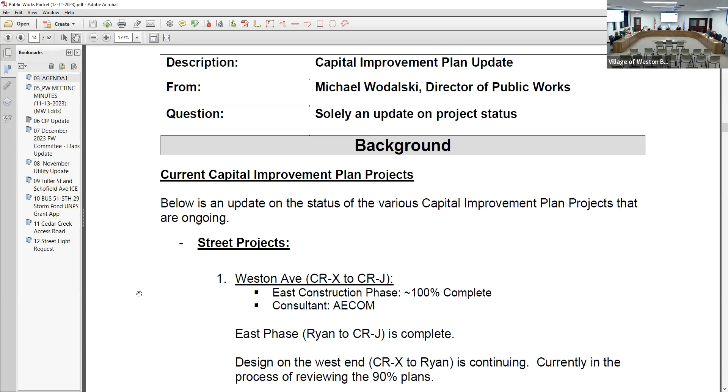Thank you. The staff report, item 6, CIP update, Michael? So Weston Avenue on the east side of Ryan is done. Driven on it. Kind of reminds me of the scene from Cars when Lightning McQueen paves the new road.

If the seeding is done, everything is done? Yeah, there'll be some restoration likely in spring where the grass isn't fully grown back through, but for the most part they were seeding as they went. How much are you holding back?

I don't know off the top of my head, but it's at least 5% of total construction. I would say 10 maybe? We can't, read the spec, see what it said. Yeah, the contract, let's see what it said. We used to be 10%. State law changed a few years ago, so now it's 5% of the contract.

So we're working on design still on the west end and right-of-way work. Currently going over the 90% plans and trying to get a meeting scheduled with AECOM. Oh, here comes someone.

Jasper, is that you? Yes, sir, it's me. All right.

Who's gonna put all the iron back in the ground? The property irons? Yeah, so that'd be the contractor, their surveyor responsible for that. Okay, as long as it's done.

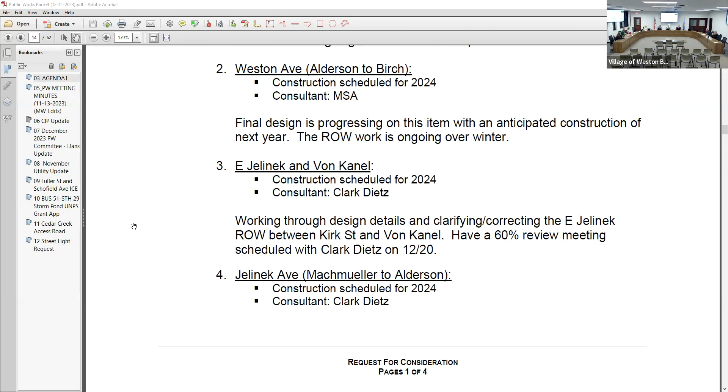Let's see, other fun items of note, we have a few meetings scheduled with Clark Dietz over the next 2 weeks to go over the 2 Jelinek projects. Looking at getting the repaving between the junior high and senior high bid out probably in early January.

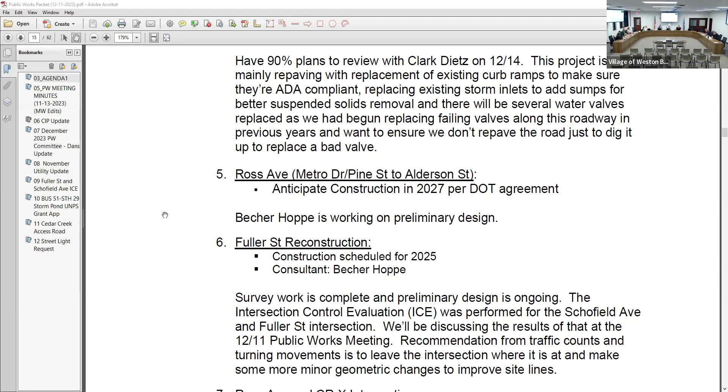And then the other East Jelinek Von Kanel bid out later, probably late February, early March. Let's see, Becher Hoppe is looking at getting a meeting with the DOT together for the Ross Ave joint project with Schofield, so we can start making sure we're following the DOT design timeline appropriately and getting that project ready for the 2027 construction.

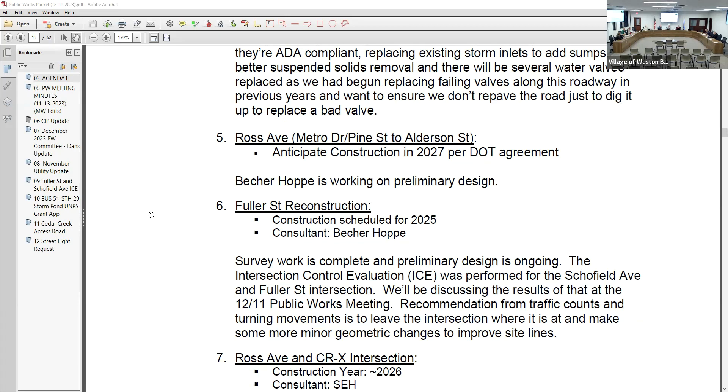For Fuller Street, got item 9 in the packet. Becher Hoppe and their consultant TADI finished the intersection evaluation for Schofield Avenue and Fuller and Old Costa, so just kind of looking at giving them direction moving forward on what alignment they should be pursuing.

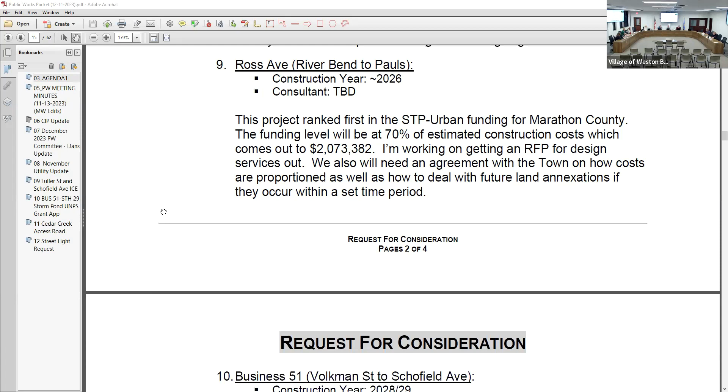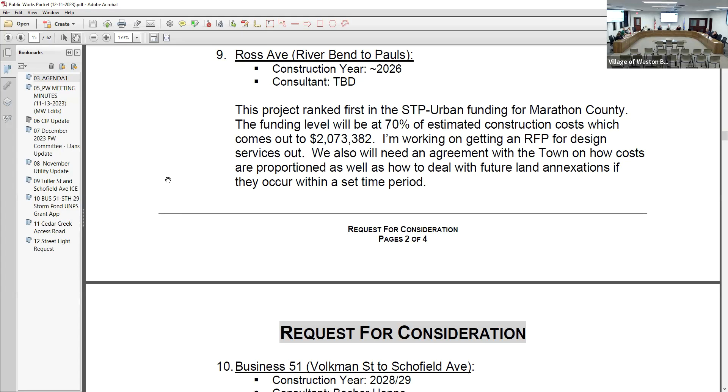And I guess the other big thing street-wise is working with the town of Weston on getting an agreement in place for the Ross Ave project, as well as getting the design RFP out for that, for construction in 2026. So we'll need to get a design going here quickly in 2024 to meet those DOT deadlines as well.

And then as we talked with AECOM on the water side earlier today, we'll be looking at getting the well 4 and treatment plant updates for the PFAS removal bid out just after the first of the year here as well. So we'll get started on that then.

Does that include the iron and manganese? It does not. The iron manganese will be after. That's part of where the DNR had us break out well 3 from well 4. So we'll be working on getting the iron manganese pilot testing done probably in January, so that we can use that data to submit well 3 for PFAS treatment and iron manganese removal in next year's Safe Drinking Water Loan Program. So it'll lag well 4 by a year.

But all the work at the treatment plant will be done and sized for PFAS for both wells, not just well 4.

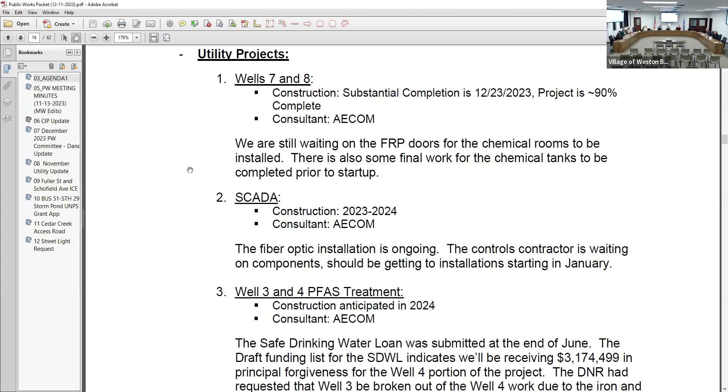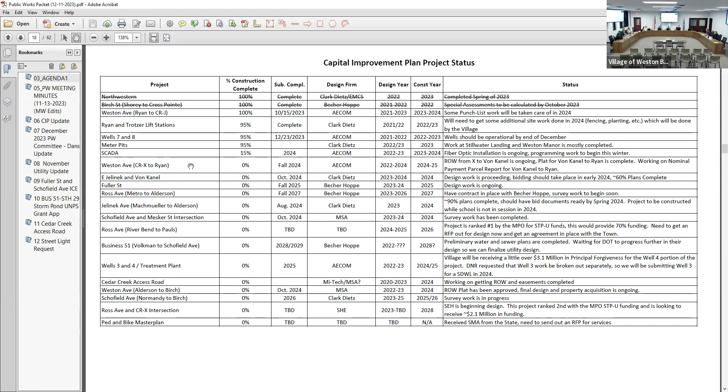Yes, I have the spreadsheet of kind of where we're at construction schedule-wise, who's doing what, and then I should start throwing a map in. At one point Luis said maps were good, he's a visual person, so red is what we're looking at getting done next year, and then orange would be 2025, green 26. So all colors of the rainbow.

And Mesker and Schofield, that'd be next year. So how's the design coming?

I met with MSA two weeks ago. We have a few utility conflicts we need to work with WPS on, with power poles and where those could get relocated so they're not in conflict with the traffic signals. Once we know what options we have with WPS, that should be able to be finalized.

I think we'd like to see the preliminary design here first. Sure, I can do that next month. Also, I think they should design the lighting so the red light comes on when the fire department takes off from their shop. Everything should be red for them before they get to the intersection. They can do that.

Is that like a special setup? Yep, they put a switch or do something in there so the fire department can turn the light red before they get to the intersection. Is it mounted on their vehicles? It's an Opticom, yeah, it could be.

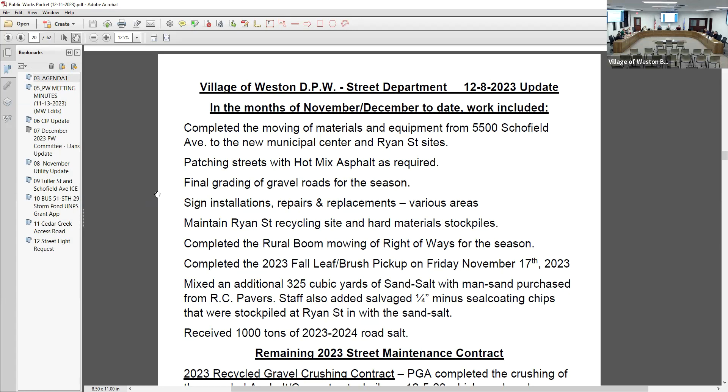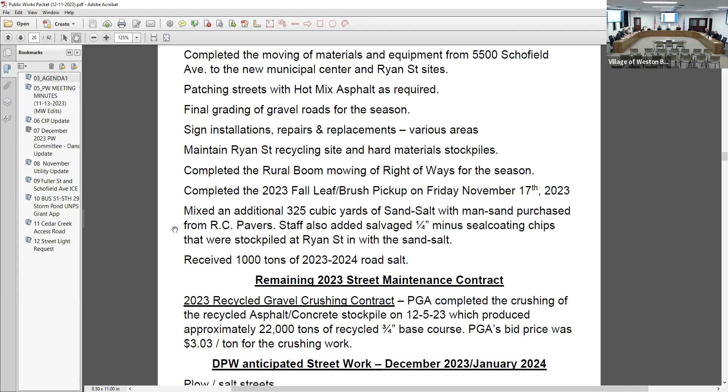Boom mowing in the right of ways — now that it's freezing up, we're going to be taking the mini excavator out. There are some places in the right of way we want to trim with that; it's on tracks and the ground is starting to freeze enough. The crew's been out trimming trees with the boom truck, clearing stuff overhanging in the right of way where it's hitting our plow trucks. That's what we've been working on this last week, and this week they'll keep working on that.

The leaf and brush pickup — we did make it by Friday, the 17th of November. We had to work overtime with one truck being down, but we got everything done.

On the last page of the report, I put a price tag on it, approximately 143,000 plus to do the leaf and brush pickup for the fall season. It's a whole month's worth of work. 143,000, and what drives the price up is we use the rates on the trucks and equipment, the Wisconsin DOT rate.

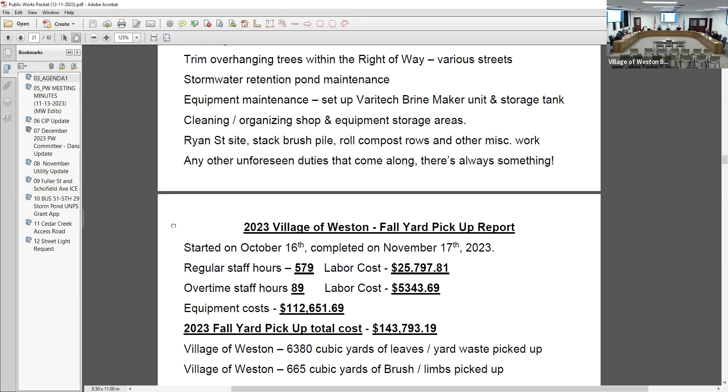So realistically, is it 143,000 coming out of our pocket? No, but if you were going to rent that piece of equipment, which is what the state does from the counties, the leaf pickup trucks are expensive. They're a triaxle truck, plus that leaf vac unit, forget the exact dollar amount, but it's like 100 and something bucks an hour to run that thing.

But we picked up over 6,000 cubic yards of leaves and grass, whatever it was, and about 665 cubic yards of brush. That goes by truckloads, and we figure they're getting about 17 yards on a truck. So I broke it down: labor was about 26,000, a little under. Overtime was another 5,000 plus, which normally we wouldn't be running, but one truck went down and the guys ran late just to try and get it done before we got snowed on big time.

You sell some of this too, right? Don't you generate 4 or 5 grand or something like that? Yeah, Sue's is buying—Kafka grinds our brush for us, they've got the big semi trailers. Sue's is buying the leaves from this fall pickup, $1 a yard, that's what they gave us last. Kafka hauls it for them, so they give us $1 a yard, plus they have to pay Kafka to truck it up to them.

So we do have at least 320-foot long rows of compost that are slowly breaking down right now that we're keeping. That was stuff that came off from the summer, more grass clippings. I hate to say it's the better stuff, but it is. So what we do is put it in rows and roll it. Then we'll either sell it once it breaks down a little more as compost, or if we need it to mix with our screenings for topsoil to get the organic content between 4 and 6%, we'll use it for that.

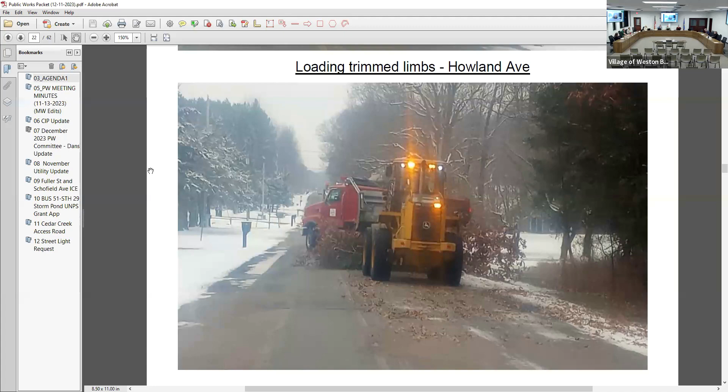PGA completed the crushing of the recycled gravel, 3/4 inch. It came up to a little over 22,000 tons approximately crushed out there. That stockpile will get used on some of next year's projects. Then after that, we're going to work on trimming the right of way.

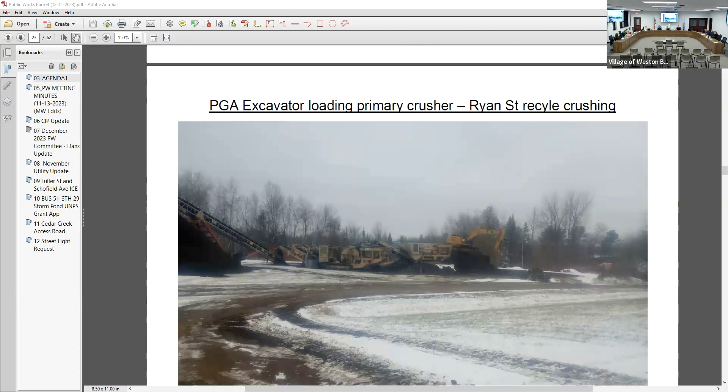And what was the cost per ton? For them to crush was $3.03 a ton, they were a dollar plus cheaper than the next bidder. That doesn't include the bit of money we have into the pile when we're maintaining it, as far as stockpiling stuff, but most of the material came from, some concrete off of Schofield Avenue, and the asphalt from Community Center Drive when that was milled off got hauled out there. So it's everything we get off the village streets that creates the material.

You have any 1.25 out there too, or is it just all 3/4? There's still some 1.25 laying on the east side.

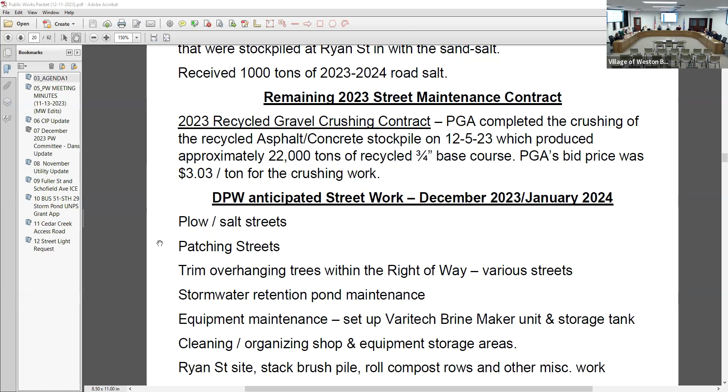So that pretty much takes care of where we're sitting now. We're trying to catch up on some stuff inside too, as far as organizing more things. It's been a dead run since last January when we moved into this building, so things are finally settling down to where we're going to be able to get organized a little more. We'll take it from there.

Did you crush those rocks too? No, he had an impact crusher and we had to get a bigger hammer there to crack the big ones. So right now theirs are still sitting on the pile. We're probably going to wait and separate those out a little bit more and go from there, and put them together with the next crushing contract, if nothing else.

You're going to bid it out again, separate contract? Correct, yeah, on the line. If you don't do it, you've got to bid it out again. It's just like two years ago when we crushed, we had slabs of concrete that came off of Schofield Avenue because CPR took them out in slabs instead of breaking it up like Norcon did when they had the contract. So when we bid out the crushing, the ones bidding included a price for a hydraulic hammer on a large excavator. So when it comes to this kind of stuff, if that's what it's going to take, then we'll let it go with the next contract, and you can crush it for breaker. We still have 6-inch minus concrete crushed down for breaker, and we've got a pretty good pile of that.

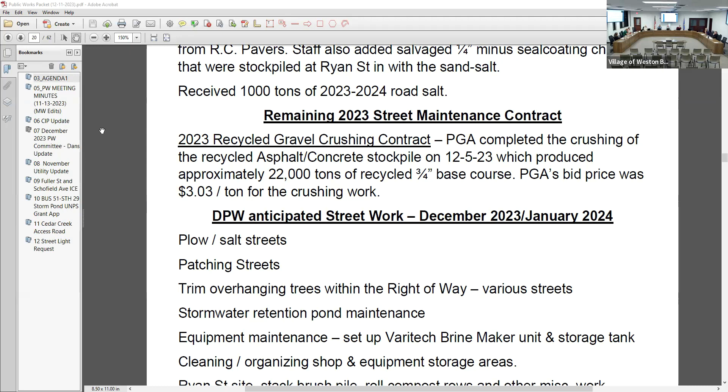Any questions? Anything else? No, I won't take up any more of your time. The rest is in the report, but unless you have questions for anything -- any questions?

We're enjoying the lack of snow right now. Facility operation update?

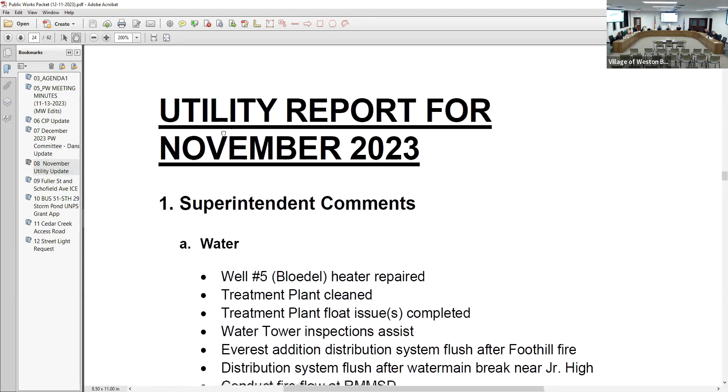Yeah, we were a little light on number of tasks last month, but the ones we did were quite time consuming. We had a few miscellaneous maintenance items on the water side at the treatment plant and a heater. We got through our annual screen inspections on our water towers.

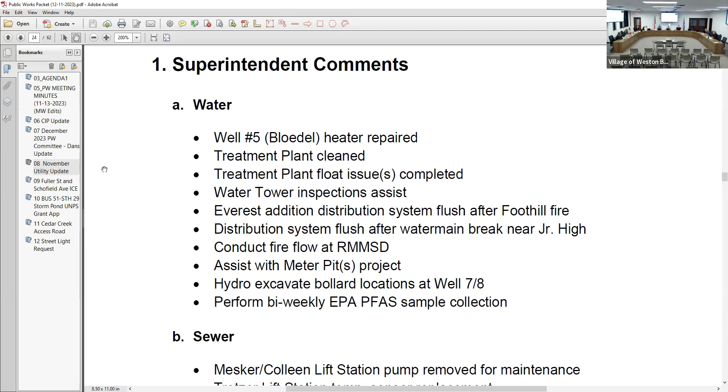The two bullet points for flushing the system, the neighborhood and residents between junior high and high school, they've been getting kicked when they were down already. We had some hydrant maintenance stuff we were doing, I think end of September, early October. They had some water discoloration and quality issues, and then there was a fire over on Foothill that caused the system over there to be in disarray, so we flushed over there again.

And then the new car wash going in over by the old Pizza Hut, they hit the water main, which caused, right before Thanksgiving, a major issue for the residents over there. So our guys spent a number of days flushing the system. The junior high had experienced some pretty poor water quality. We thought we had isolated it, but it was pretty bad, so our guys spent quite a lot of time trying to get everything sorted over there.

I think the complaints had calmed down before Thanksgiving. Did they call it in, or did they not call it in? We happened to be there, I don't know, marking something else. We had gone there and told them to tread lightly with the excavators and kind of hand dig once they get close, and the next scoop, they got it.

It's an AC main that will probably be getting repaired down the line as part of the 51 redesign. But it caused quite a mess and a lot of time. We were having complaints, and I don't know if it fully drained the tower, but it threw the whole system basically almost all the way out to this area, where I think Patriot Auto had some issues caused by it. So just a big rush of water going that way.

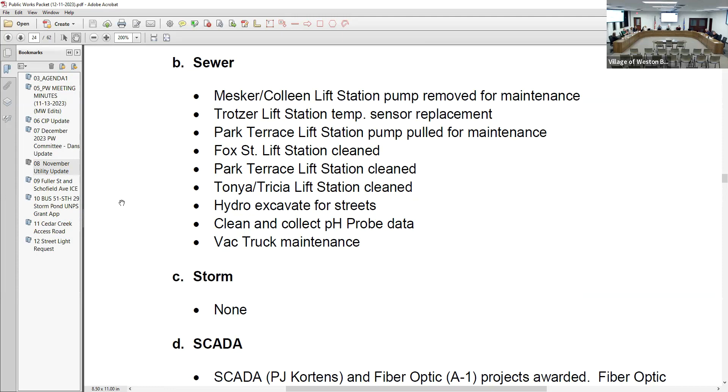Onto the SCADA stuff. The SCADA portion is still in the collection of materials phase for the fiber project.

Should be nearing completion. We had a little issue over at the well 7 and 8 project. They bored through a conduit that had some wiring going out to one of our pitless units at well 8. That was actually repaired as of Friday when A1 hit the conduit. Ellis, or AECOM I guess, was out there. They fixed the conduits and everything should be back up, and I think they said they should be able to fill the excavation today.

Is A1 finished? Not quite, I think they have most everything run, but I don't think they have the pad yet. We're waiting on a patch at the well itself - it's above my head - to go from the fiber optics to the Ethernet. They have some patch that they have to put in there. Is he going to do all that work? A1 doesn't do that work, that's PJ Kortens' integrator who will be doing that.

What's all the new equipment on the project? Yeah, the conduit should all mostly be in. I'm not sure where they're at with getting the fiber all connected to each other though. I think they were pulling fiber to this building middle of the week last week. They had it run into here, and then I think they were going to start pulling it out that way.

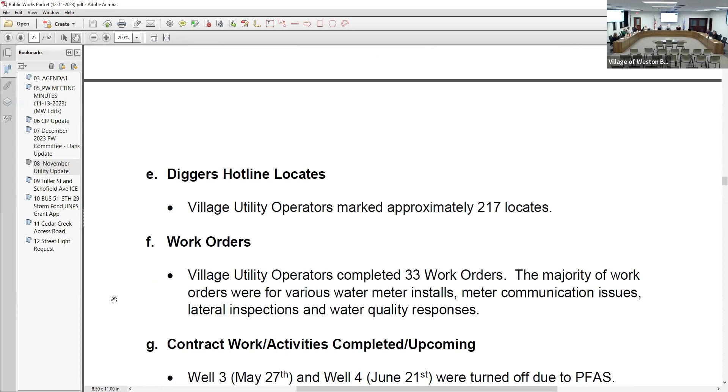Utility locates had a couple hundred last month, a couple large areas. Our guys marked out the utilities for the Schofield and Fuller designs. Stacy keeps our boys busy with a lot of work orders still, getting some of our no-reads for our meter issues. I think we touched on most of the contract work stuff through Michael's.

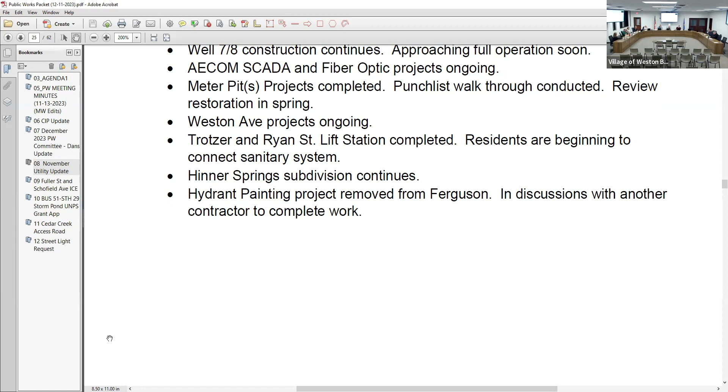I guess the meter pits project has been completed. There's a punch list we had last week - just a little restoration we'll have to take care of in spring. I think plant a tree at one of the spots. So other than that, the meter pits are up and functional and above ground, so we don't have to go into confined space anymore.

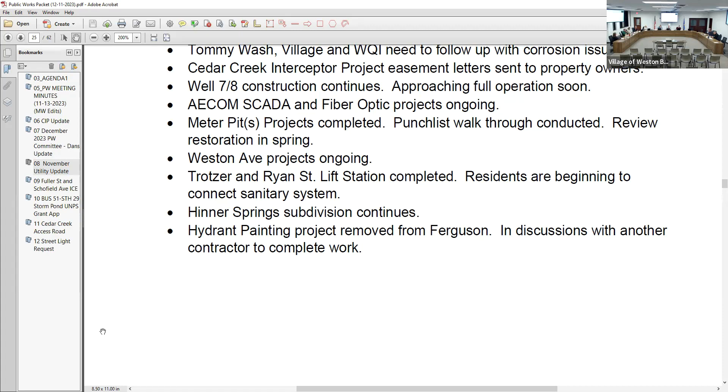And beyond that, we have our customers added last month, our water pumped, our wastewater flows, and lift station hours. How many customers do you have? 52.

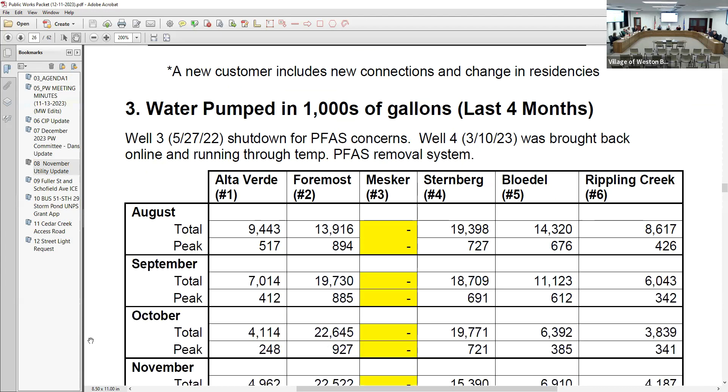It seems to be kind of the norm, usually about 50 or so. And after that, we did add, I guess, complete a few extra SOPs. We have a few others that should be wrapped up for the next meeting. So I think we have a whopping 5 so far.

Any questions for Josh?

One thing while we're on the water side of things - we are working on getting our paperwork submitted for the PFAS settlements with 3M. Just the first round, right? Correct, yeah. Thank you, Michael.

Are you doing that or Josh? He's doing most of it. It was kind of trying to determine some of the language that they put in there, which would determine if we're going to get more dollars or fewer dollars. So we went the more dollars route at this point, and they can tell us if we're wrong. No, they're going to count every penny of it, so we'll see.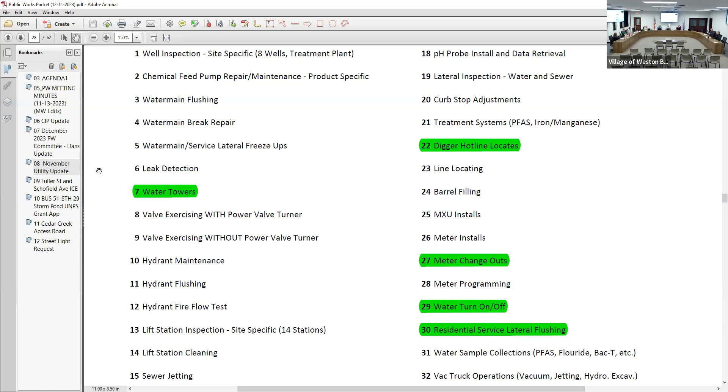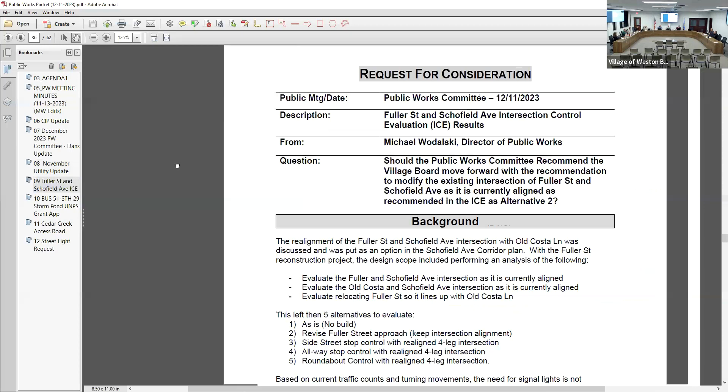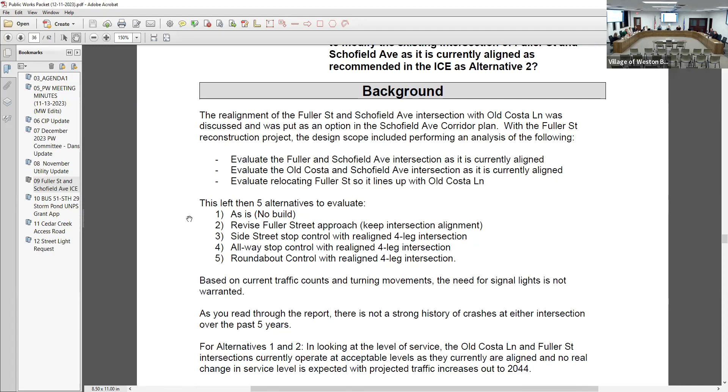Policy discussion and recommendation. Item 9, Fuller Street and Schofield Avenue intersection control evaluation, ICE result. Michael? Yeah, so as part of the Fuller Street engineering design, the consultant was tasked with running an intersection control evaluation at Fuller and Old Costa Lane as they currently sit, kind of as offset intersections. Let me show a diagram here quick.

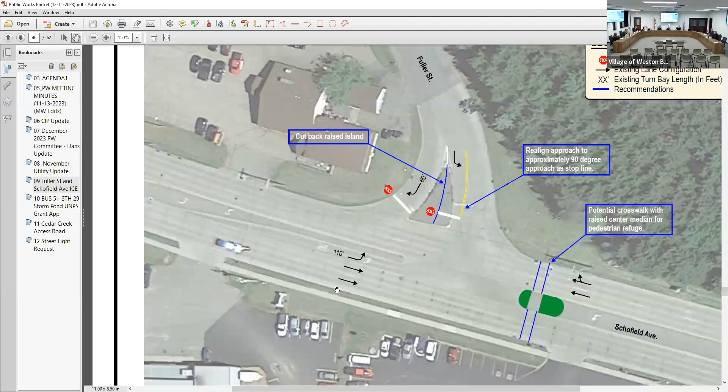So right now Fuller Street's a T here - this one's better. Fuller Street currently is about here, and then 600 feet or so is Old Costa Lane. So the analysis was, do we leave them offset as they currently are? Otherwise, a thought was to realign Fuller Street so that it matched up with Old Costa Lane and formed a traditional four-legged intersection.

I guess as they went through it, the current alignment performed satisfactorily - there's really no long queues or service delays. The one suggestion was to cut back the pork chop island so that this left turn could be at more of a 90-degree angle versus the current roughly 74-degree angle, since that can make the vision difficult for somebody trying to make that left turn.

The full realignment at Old Costa, if it were to just be a stop control like it is now, would make turning movements from Fuller and Old Costa more difficult. If it were to become an all-way four-way stop, traffic on Schofield Ave itself would perform at a lower service level. So the only way that realignment made sense would be if we installed a roundabout there. But realistically, based on the traffic counts, it's not something they would recommend given the cost of the roundabout versus the benefit to traffic flow.

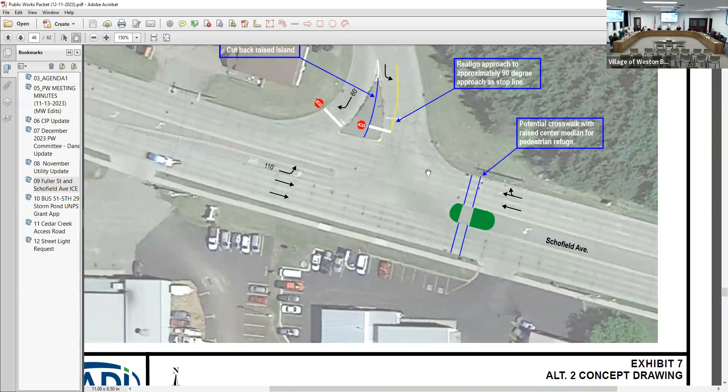So the recommendation is to stick with the roads as they currently are, with a slight modification at Fuller Street for better vision, and then probably revisit this in 10-15 years to see if traffic patterns have changed drastically. One thing that's hard to predict is that putting the traffic lights in at Mesker Street next year will also affect the free flowing traffic heading eastbound from the west. So as far as that left turn goes, there should be more openings in the future once traffic at Mesker is stopped.

So the analysis that went through my head was: 15 years from now, will we regret not doing this? That's what I thought when I read that we'd look at it again in 10-15 years. Is there a reason? Let me ask you this, what is the traffic forecast for 20 years over there? It all depends on what gets built and how people will access it.

I guess the only thing that comes to mind is stuff that might develop off of Ross Avenue on the north end there, out into the town. But as you get further out, is traffic going to come all the way back through here, or are they going to use Guzman and go out to J?

The thing is, if you're at Fuller and the soccer game is over, and you get lucky and get into that intersection, you're stuck there. Or that's where Mesker is, half a mile away. Do you get in the habit of going to Mesker? You don't know that. Especially if people are coming from the other side of the river and want to go to Ryan Street, they're not going to go to Mesker, they're just going to take a left, that's it.

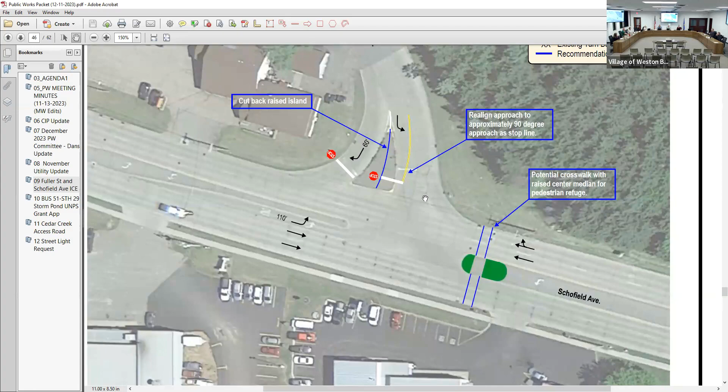I think the other consideration too is, the traffic flow may be one thing, but it's not really taking into consideration how many people probably sit at that intersection either. They looked at the delay, that's all part of the analysis that's saying not to put in a roundabout. The roundabout would make it so there's pretty much no delay for anybody in any direction.

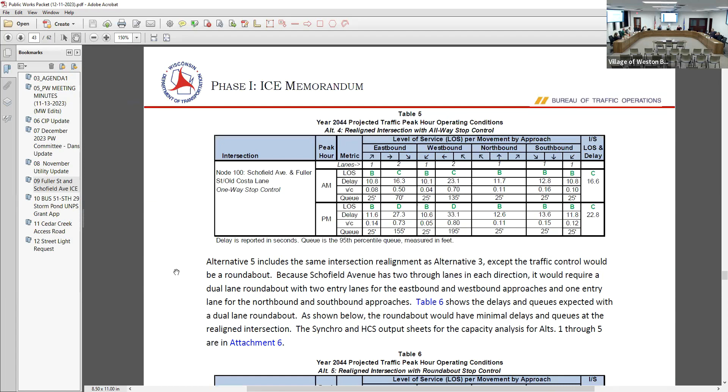But again, that's probably adding $1.5 to $2 million to the project. So if we want to do that, we can, but that cost isn't necessarily in the budget for 2024, so we'd have to look at reprioritizing some items.

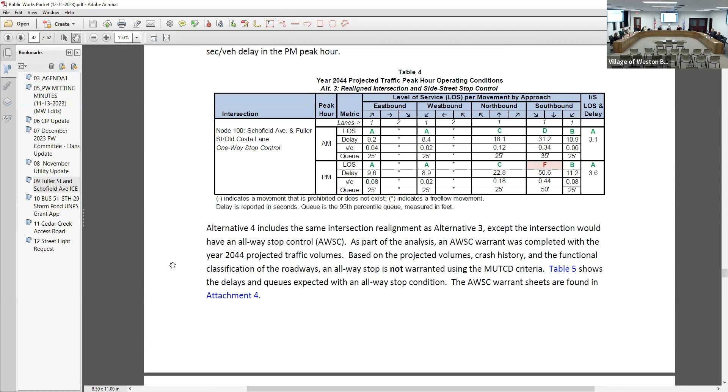Thing is, if it has to get done 10 years from now, it's probably going to be double the cost, and that's the problem, exactly. You hate to do it, and then all of a sudden, 10 years later, why didn't you do it in 2024? That's the only thing I worry about. The next people sitting here will say, what were these people thinking? Why didn't they do it? If we save a dollar now and then pay the price later, that's all it is.

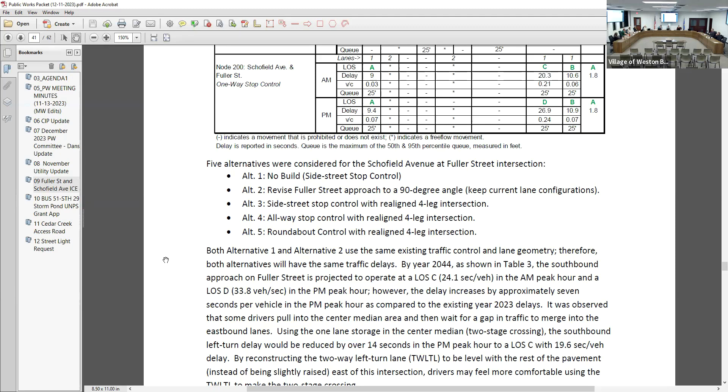I mean, it's a projection, and I know we went through the lights and decided we didn't need one at this point here, but it's going to be too... it seems like they're going to just domino their way right down that road, aren't they, on Schofield? Yeah, it could.

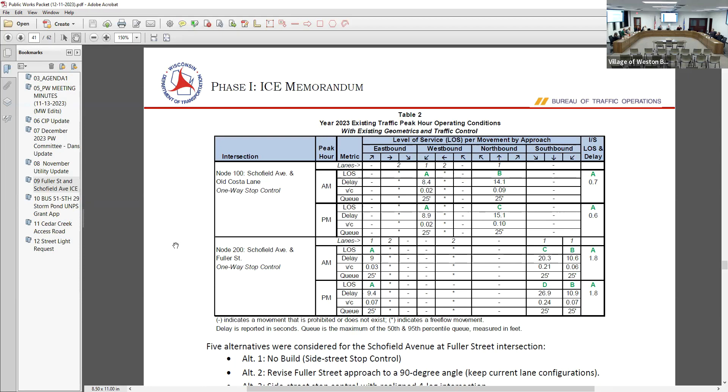This is a tough one. People visiting the area probably won't be familiar with alternatives, but from my perspective, in my neighborhood I know if I go down to East Jelinek at 4 or 5 o'clock and try to turn onto the main road, it's impossible because it's hard to see and very busy. So I know it's easier to go up to Barbican and use the traffic lights to get out easily. As a resident close to an area like that, I know my alternatives that make it easier and safer to get out.

I think certainly people may defer to Mesker and use a more controlled intersection where they think they're safer. I think we also have to consider that we want to make sure Fuller remains a safe road. It's a pretty narrow road, and as traffic increases, maybe it's better for traffic to seek an alternative road. I don't know.

We're not forcing them to go to an alternative road, but for traffic turning right onto Fuller and heading north, there's really nothing that's going to impede them currently. It's really just that left turn onto Schofield Ave. So when's Fuller scheduled to be done, 2025? So in two years.

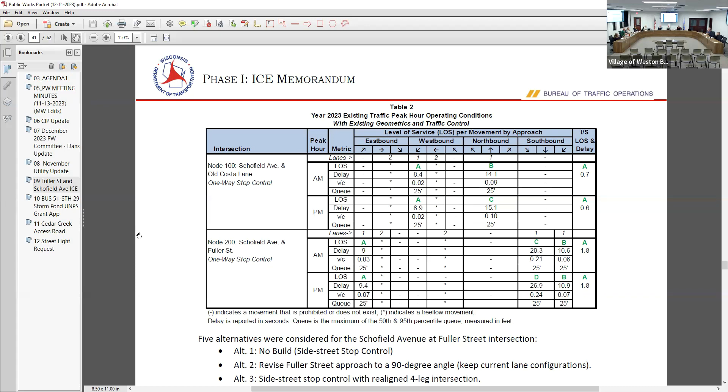Does that roundabout's projected cost include the possible cost of acquiring the land from the bar to make that road go through there? I don't think it included the land cost, but it did include the street.

As far as that land, we could look at probably a land swap even. Yeah, with the arrow, probably swapping - is that arrows on the east side of that tree line? Correct. So if we gave them back the road, that would basically be ripping up...

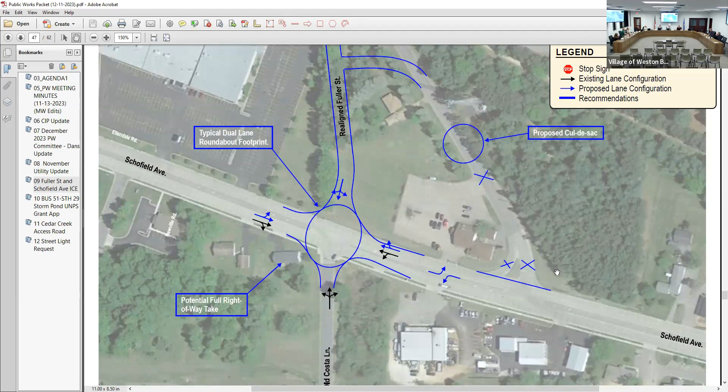Yeah, they'd have a much bigger parking lot if they used that area, I guess. They wanted that the first time. It's not... it's a cost, but I don't know. I just don't like that intersection the way it is. They've got plenty of room for parking.

And you get back - yeah, well they're doing more and more of those outside activities and everything, it's getting more and more popular over there. They've been doing more of them anyway, it feels like they're doing more of them this last year than they have.

And eventually, if you don't do the roundabout, do you put a traffic signal in there in the future to allow for a left turn? That would be a possibility in the future too, yeah.

I agree with you on a right turn, it's not a problem, but a left turn, yeah, especially now you're always doing this. Yeah, and that's why they did recommend realigning it so you're not trying to look backwards behind you. Well, you got some folks coming down that road from the east too, going pretty quick.

And the traffic light over at Mesker is going to be great for the eastbound traffic, but it's not going to change anything on the westbound though. No, and that's where a lot of it's coming from - that's the issue.

It depends what time of day - are people going to the elementary school, coming back from it, or are they coming back from work in the business park? Yeah, you've got a lot of county trucks and stuff coming through there too.

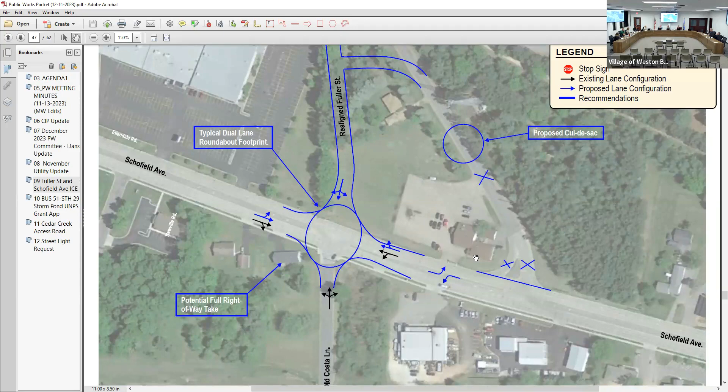The more development you get off Ross, it's going to feed Fuller eventually, right, to the school. You've got a morning problem when people go to school, you've got 3 o'clock when school lets out, then in summertime or even before school is out there's a soccer game in there too. It's starting to be a pretty busy area.

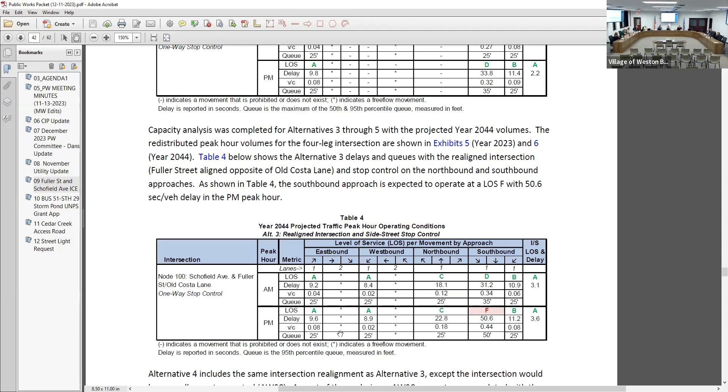It is, and it's gonna get busier. I just think if there's a chance it has to get redesigned or upgraded in 10 to 15 years, you gotta do it right away.

I kind of like the roundabout, that was my own analysis. But that's the thing, that's what we do with all intersections, right? Like this one out here that went in 2000, it said in 20 years, take another look at it. 20 years later, we go, yeah, okay, do it. I don't want to spend the money two times.

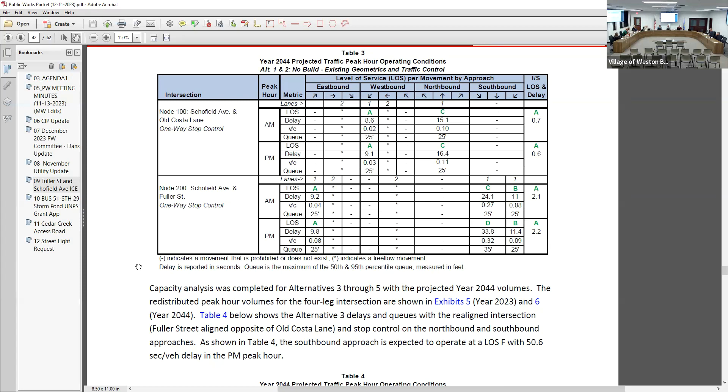So I guess this table kind of shows the projected 2044 numbers. I get the traffic, but I feel like there's plenty of people who think it's a problem now. And that's my thing with it, the traffic pattern may not be accurate. So here they calculate the average delay was about 34 seconds during the PM rush, and it was 24 seconds during the AM rush.

I'd like to actually see how they calculated that. I'm kind of curious how they calculated it, because there are times where you kind of thread the needle, you're just kind of hoping you got it.

Go for it. No, you go sit there with your truck and the trailer behind it, yeah, that's the other thing. Then see how much delay you have. If you're carrying a load and you're not off fast, if you're in a car it's one thing, but if you're in a truck with a load and you gotta make it out there, that's different.

Let me ask you one other question that factors into this, and I don't know if you have any of these answers. We're gonna put in some kind of a walking path or something along that Fuller, correct? Correct, yeah, that's the plan. We don't know which side of the road it's gonna be on at this point.

Is it more attractive? What is there on Old Costa, or what's the plan there? Is there gonna be any walking path eventually put in there? Would it be a benefit to the community to tie it together, so that you've got a singular pathway, because right now if you go the other direction, you're gonna have...

Anybody that's gonna use that walking path is gonna get to the end of there, and I guess you could go right down towards the schools, or left down to the school, depending which way you're coming. There is sidewalk on Schofield Ave the whole way. Old Costa...

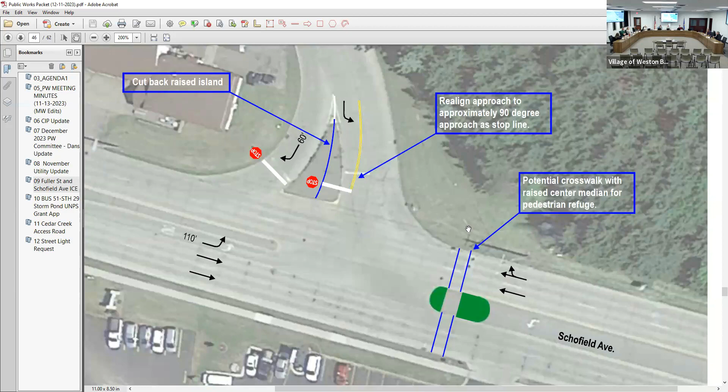This was part of the early steps in the process, figuring out what we want to do at Schofield Ave so that we don't end up designing this two or three different times. We're planning on putting the sidewalk on Fuller. It's classified as a minor arterial, so anything classified as collector and above, we put some kind of pedestrian accommodation on, because the traffic counts are at a point where you don't want pedestrians conflicting with cars.

The southern portion, or third, of Fuller Street is a little more industrial with waste management, so we'd go with a multi-use path through there. Then when you hit the residential neighborhood at Rogan heading north towards Ross, the initial thought is making that a sidewalk on both sides of the road.

Is waste management going to stay there? As far as I know, yes, unless we have an account with them and they shut down the contractors. I was just curious. I mean, if it's not them, it's always been a garbage company there for the past 40 years. Or rather, you'd want them not to be there? It's not a good place for them. You can smell that area, it stinks when you're on the Mountain Bay Trail. They should be out at the edge of town, not right in the middle of a residential area.

Well, years ago they were out there. That will break my heart. That was 40 years ago.

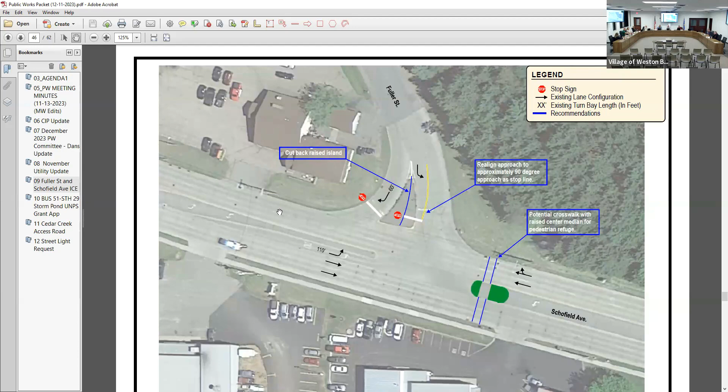I prefer the roundabout and also this minor correction to the intersection, though I'm not sure how much it'll solve the problem, because I know they sit down there with their pickup truck. I think they should try with the trailer to get across that area with traffic coming from each direction and see how long you're sitting there.

How many school buses go down Fuller and make that left turn? That's another big concern to me, just from a public safety standpoint. You don't want...

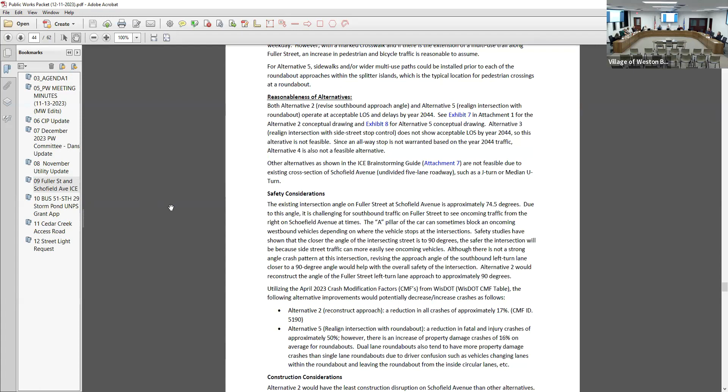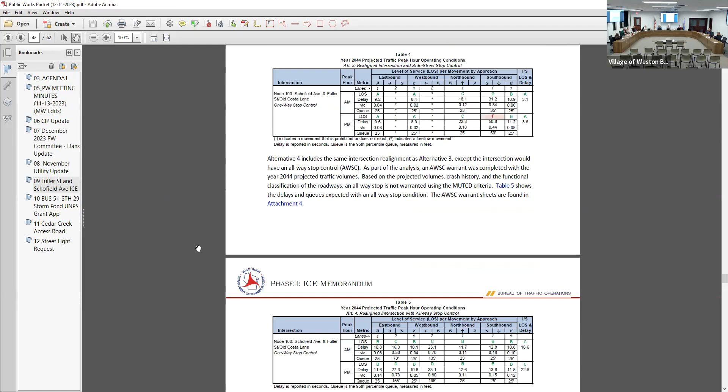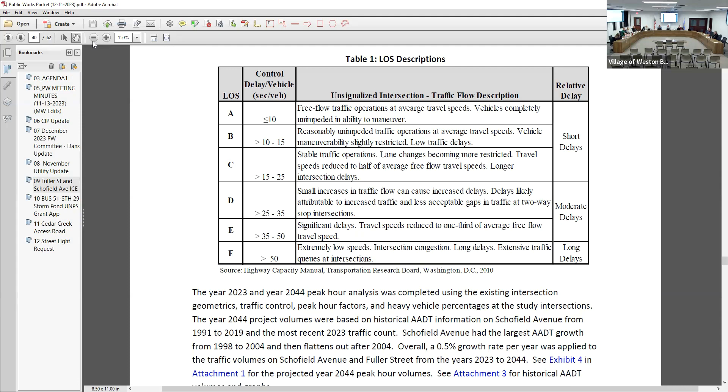It wasn't a lot. One is too many, Michael. Yeah, I know, but unfortunately that's how a lot of priority stuff works - you wait until there's a problem, until a bus gets hit, and then everybody asks why. It's like DOT - they don't do anything at the intersection unless somebody gets killed.

I don't think anybody who lives in that area or uses that road frequently realizes it's an issue. Oh, it absolutely is. I'm saying if we're redoing the whole road, we've got to address that intersection while we're doing it.

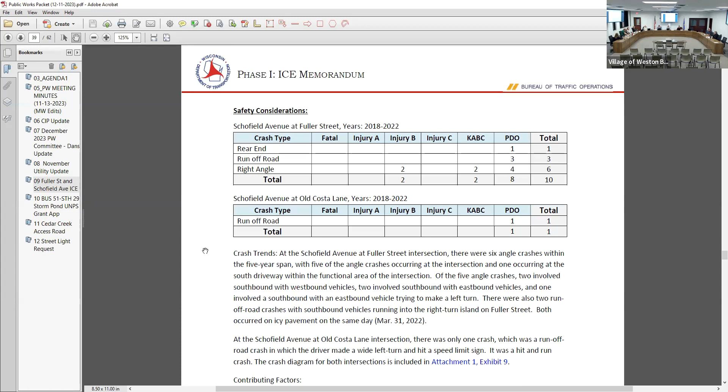When Waste Management was taking contractors out there, I was in and out of there a couple times a week, carrying trailers.

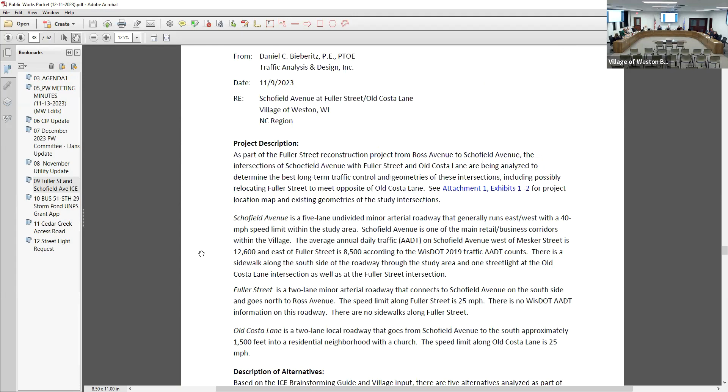My vote's on the roundabout personally. I think I would too. For the next 10 to 15 years, I think the right answer is no cul-de-sac, but after that I don't know - I think it probably is the roundabout. I don't want to wait 15 years and spend $4 million; I'd rather spend 2 million now and get it over with.

And solve the problem. I think a lot of people who live down that road, or up off east of Ross, will see their travel through there improve as well. That whole area back there has a ton of people living in it.

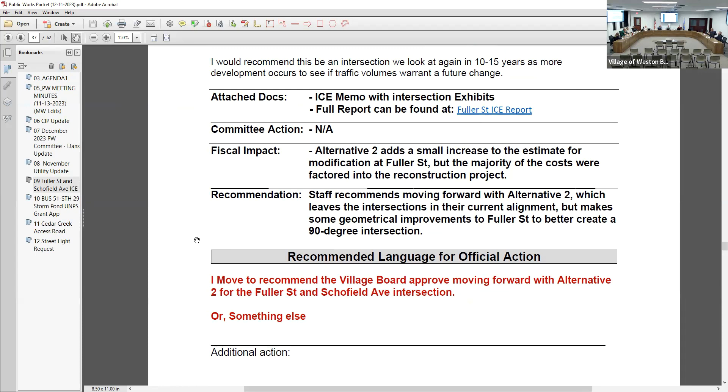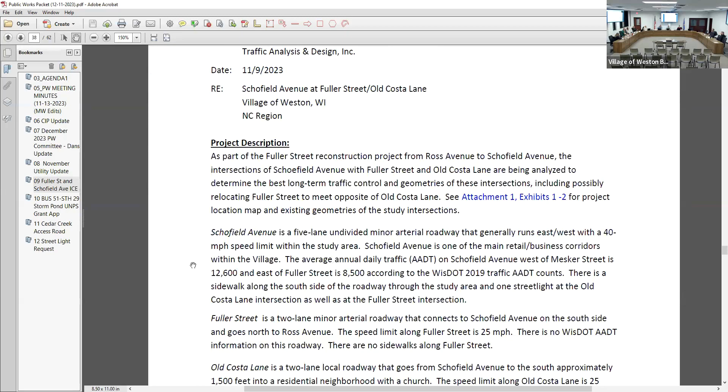I'll make a motion - like alternative 5 if you're looking for the roundabout. Here's the language for alternative 2, but I move to recommend the village board approve moving forward with alternative 5 for the Fuller Street Schofield Ave intersection.

I'd just clarify that's the roundabout and realignment of Fuller with Old Costa Lane. Would you add that language to it, please - the comment Michael made? Yeah, I'll get it. Thank you. Good, thanks.

Any other discussion? All in favor signify by saying aye. Aye. Opposed? Motion carries. Thank you.

Item 10, business 51 / STH 29, the stormwater pond grant submittal. Michael?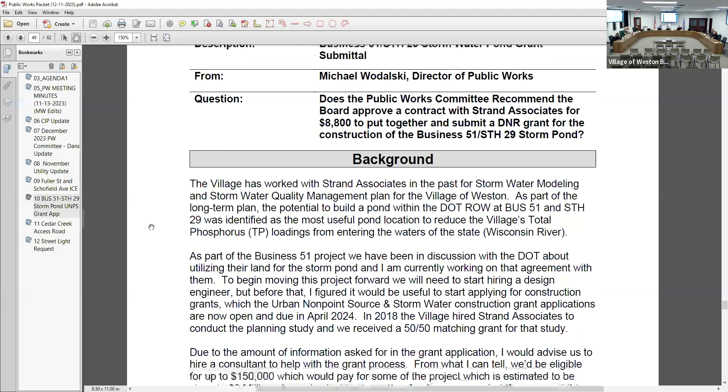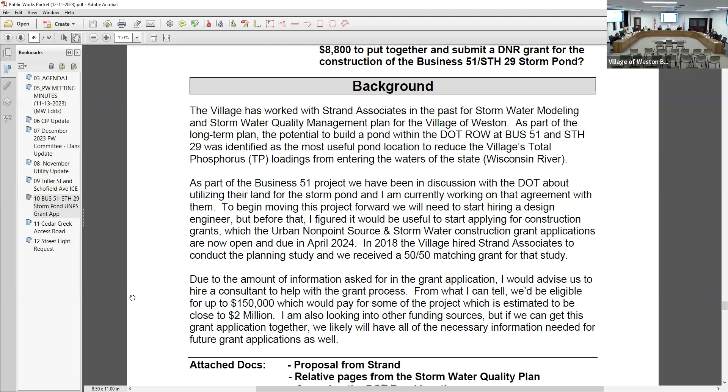This is a contract with Strand Associates for them to put together the DNR grant for constructing the storm pond at the on-ramp of Highway 29 at Business 51. This would be for the UNPS Urban Non-Point Source and Stormwater Construction Grant. This pond was noted as the #1 project to help the village reduce our total phosphorus loadings.

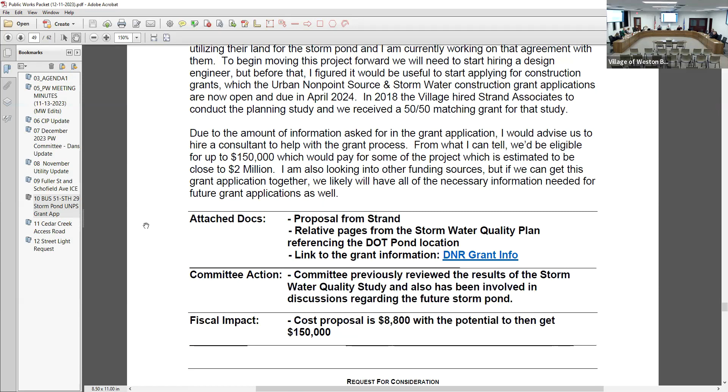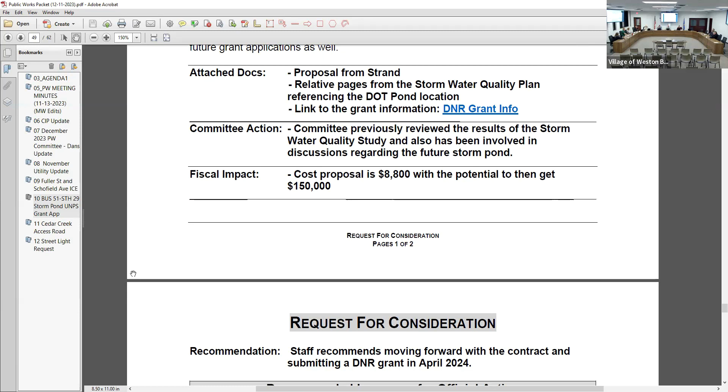We currently have a 60-inch pipe that goes from Hughes Avenue under Volkman Street, pretty much straight to the Wisconsin River, with a few connections from the village of Rothschild and city of Schofield at Business 51.

So where is it discharging to the river? Right by the aquatic center they have there. I can show you a picture.

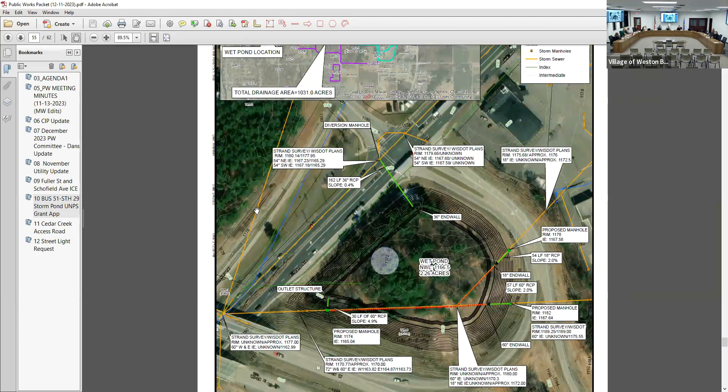This was a negotiated contract with Strand. They did the stormwater master plan work, so in reality they already have a lot of the data and information we would need. If we hired somebody else, they'd have to start over and grab a lot of that. Yeah, because we've been working with them to get a lot of this already. That makes sense - so this would just be for the urban non-point source grant.

I have a preliminary meeting scheduled with Strand later this week also to look at the Clean Water Fund.

A flood mitigation grant, a FEMA grant, and there's one other program, so overall we're probably looking at submitting three-plus grant applications to get this pond funded from other sources besides just their own. So this work would be something we'd be able to use for those other applications as well.

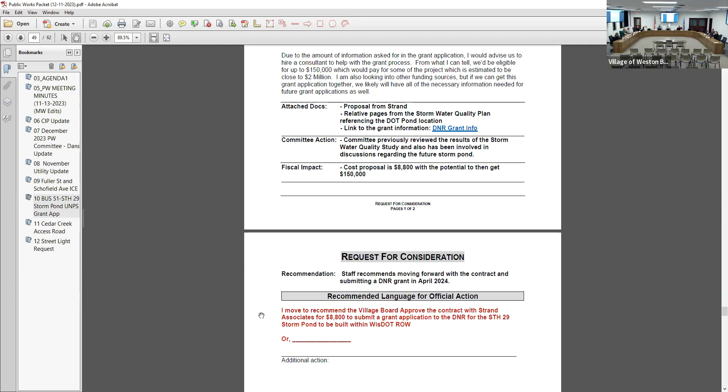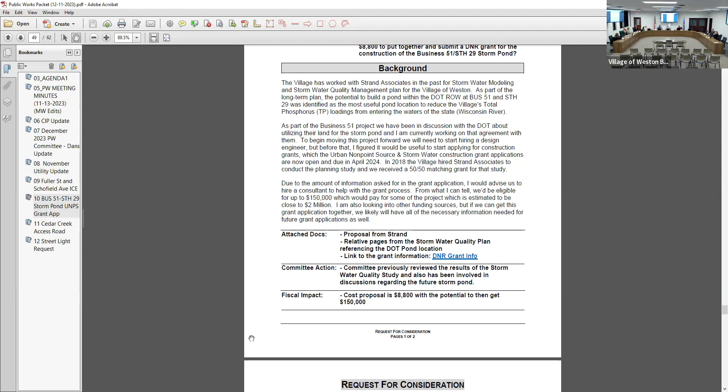Just for clarification, the cost proposal is 8,800 with the potential to then get 150,000 in grants. So we're spending 8,800, possibly getting 150,000 back. Do they pay more for that 8,800 too, like engineering costs? No, this one would be strictly for construction. But there are other grants, like the Clean Water Fund and FEMA grants, that engineering services could be eligible for, so we'd be able to possibly recoup that on top of it. Correct. Otherwise, it comes out of the CIP.

Anything else? I'll move to recommend village board approve the contract with Strand Associates for 8,800 to submit a grant application to the DNR for the STH 29 storm pond to be built within WisDOT right-of-way. Is there a second? Other discussion?

All in favor signify by saying aye. Aye. Opposed? Thank you, good job, Michael.

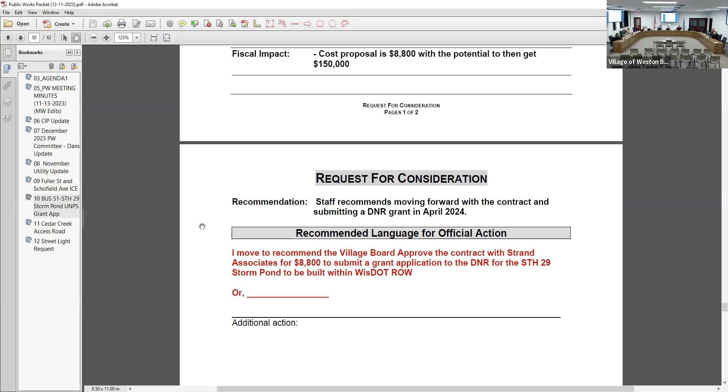Item 11, Cedar Creek Interceptor Access Road Update. Trustee Zagami had asked for this to be put on. So, this started back in 2018 when we did village-wide televising of our interceptor sewers.

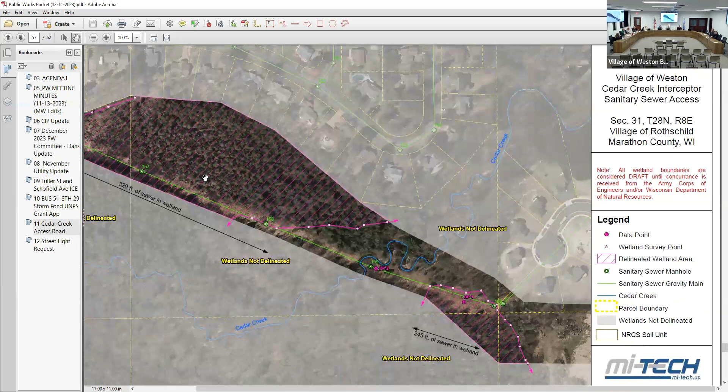At that time, the contractor had to utilize off-road vehicles to get this portion of the Cedar Creek sewer televised, from Sandhill Drive to Madelyn Court. This area is just west of Alderson Street, with Alderson Street just off screen to the east here, Wausau Tile about a couple miles to the west, and Shorey Avenue at the top of the screen. So this is in the village of Rothschild, in a low-lying wetland area that we just really don't have access to.

It's one of those things we've been trying to figure out—how can we get our truck back there so we can make sure we're adequately cleaning this sewer. Probably about half of the village's wastewater flows through this area, so if there were ever an issue there, we'd need to get there quickly. There's an inverted siphon underneath the Cedar Creek crossing, so there's some intricate infrastructure for the wastewater system.

We began working on getting the access road and easements drawn up in 2019-2020. COVID hit—not a great excuse, but it did—and it delayed a few things. Then as we started getting back out there, we noticed some discrepancies between where the existing pipe was and where the easement said it should be. We also started running into some property owner disgruntlement and a change of ownership for one of the major landowners there.

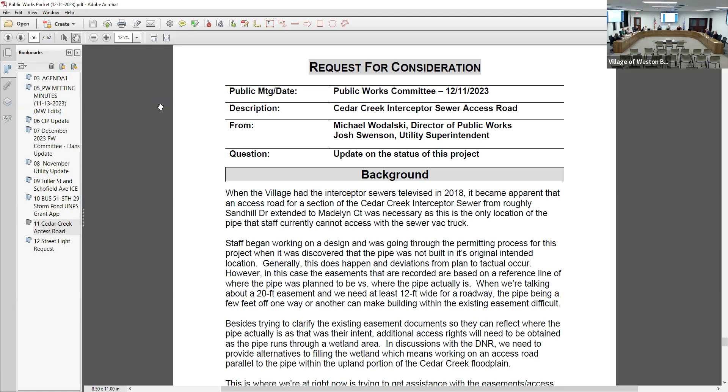So I hope this will be something they can assist us with and get it back in the queue here over winter, and get this project going again, because it is something we should have in place for cleaning access.

Do we have a budget or is it T&M? Right now it'd be T&M. I'm waiting for a proposal from them. They're reviewing—I gave them the documents we have to this point so they can provide us a scope of services. Okay, any questions for Michael?

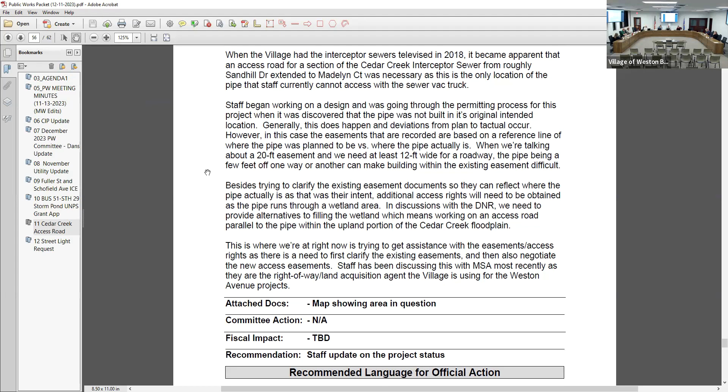Item 12, street light request—we need to move on that. That's really just an update, I guess. When I get a proposal, I'll bring it back to you guys. There was an action item on there, so I just wanted to make sure we weren't missing it. I just said I moved to recommend.

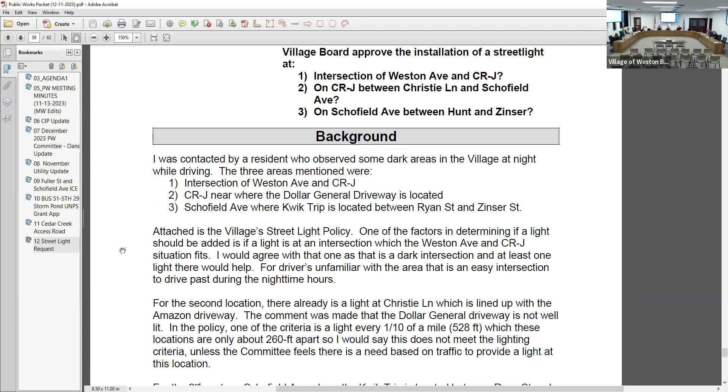Streetlight requests - it seems like every year when winter sets in, people start noticing dark spots around town. Over the last couple weeks, these were some areas I received calls about for new lights. One that stands out to me, that I myself was surprised we didn't have a light at, was County Road J and Weston Avenue. I was kind of looking at the new road out there at night. First I thought maybe the light was just disconnected from the intersection when it was redone, but turns out we don't actually have any lights at J and Weston Avenue.

So I would recommend we at least get a light installed out there. The other two, by the Dollar General on J and Kwik Trip on Schofield Ave, between Ryan and Zinser. Maybe the one by Kwik Trip, there's a snowmobile crossing there. Might be helpful for visibility of those, especially come winter time if we have snow, when people are crossing there. I've seen people walk across that spot too.

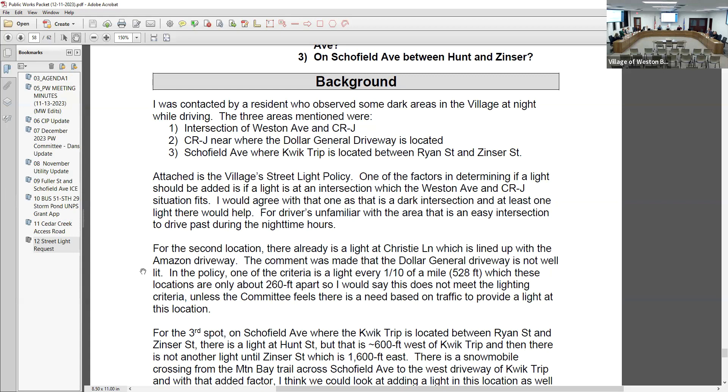The Dollar General, I was out by there, and there's that one light real close, so if they wanna put a light in to illuminate their driveway, they can do that. And that one actually doesn't meet the criteria in our streetlight policy either. The other, Weston Ave and J, definitely does, and the Schofield Ave one, it's far enough away from the nearest streetlight that it would fit the criteria for putting a light there.

And there again, I just comment, it makes sense to me on the third one, because I just thought, how many nighttime activities do you have with all the soccer fields and the practices - I always look at that as a public safety one right now. That's very close to the schools.

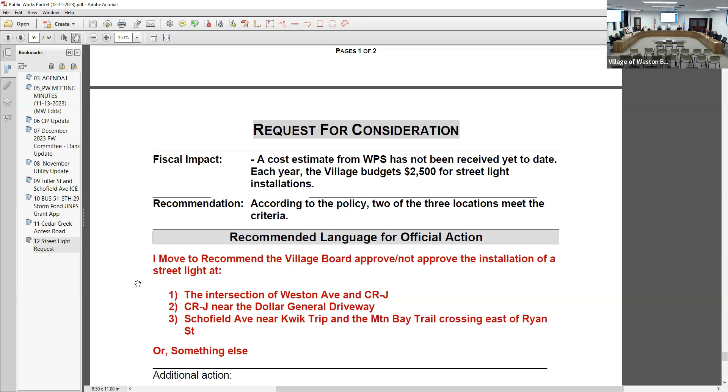I would make a motion to recommend the village board approve the installation of a streetlight at options number 1 and number 3, leaving out number 2. I'll second. Discussion? All in favor signify by saying aye. Aye. Opposed?

Thank you. Michael, First Street, did you put that on yet, or were we talking about putting a streetlight in at Birch Street, Birch and Foxtail Court - that was a little while ago? I thought I remember you talking about southwest of the trailer park there. Yeah, that. Is that up? I would have to go by and look.

I know we sent in the paperwork in May, and although I think unfortunately this spring a light was installed that we had requested from WPS almost 2 years ago. All right.